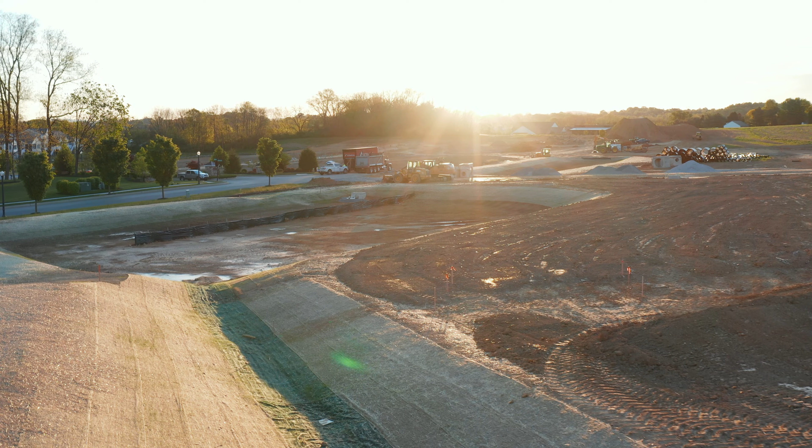I'm sure everyone's aware of the 2022 National MS4 Needs Survey, but I want to briefly discuss some of the findings and highlight areas that pose the greatest challenges. So survey responses indicated that municipal governments nationwide spend an estimated $23 to $40 billion annually on stormwater programs and infrastructure investments, and only 32% of those respondents stated that they didn't need funding beyond the existing budget.

Additionally, it was identified that aging infrastructure, a lack of funding or availability of capital, and workforce and staffing needs are the top challenges for stormwater programs. And limited funding is consistently cited as a challenge for stormwater programs throughout the nation.

Respondents were also asked about their information and technical resource needs related to the MCMs and other aspects of permit compliance. And they ranked the highest need being funding and financing, then asset management, and the third highest was for green infrastructure and innovative SCMs. So the last data point that I want to highlight is when MS4s had to rank their information and resource needs associated with MCMs, post-construction scored the highest.

So now that we've established that most MS4s are struggling with post-construction, I want to talk about some of the more detailed issues and challenges surrounding MCM5. I want to start by briefly defining what post-construction controls are and then go over the MCM5 permit requirements. The major requirements of MCM5 can be broken down into 9 distinct sections. Also, it's important to note that these requirements apply to new development and redevelopment projects that disturb greater than 1 acre, or projects smaller than 1 acre if they're part of a larger common plan of development or sale, and all projects that discharge into the MS4.

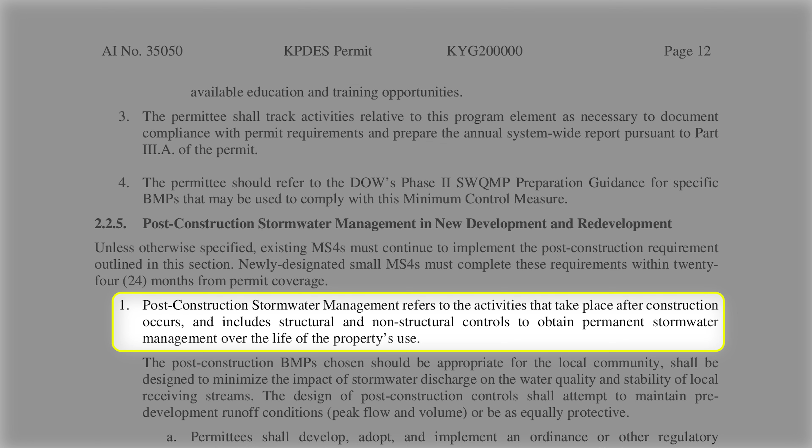The Kentucky MS4 General Permit defines post-construction stormwater management in the following way. Post-construction stormwater management refers to the activities that take place after construction occurs and includes structural and non-structural controls to obtain permanent stormwater management over the life of a property's use.

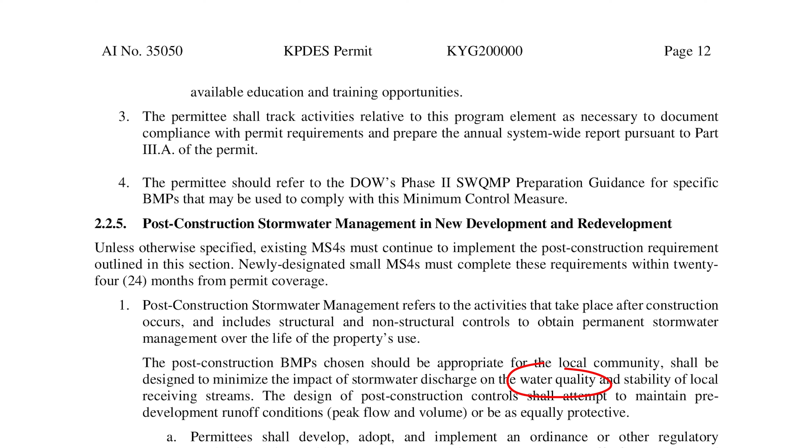The permit goes on to provide a little more context on those activities and controls, and from the language we see here, we can clearly see that the primary objective of implementing post-construction BMPs is to protect water quality. However, historically, quantity control has often taken priority, and we'll discuss that later on as we review some of the data from the annual reports and the curated sources. For now, I just want to continue examining the permit requirements around post-construction management.

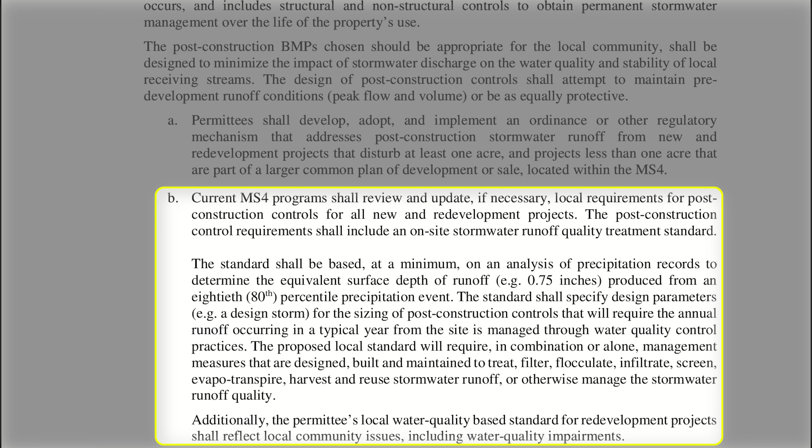So item 1A just requires the establishment of an ordinance or regulatory mechanism to address post-construction stormwater runoff. And the mechanism ensures that any new development or redevelopment incorporates proper stormwater controls from the design stage through long-term operation and maintenance. 1B delves into the local post-construction requirements and the inclusion of a water quality treatment standard. You all are intimately familiar with these details, so I'm not going to go into depth. I'll just move on to the next point.

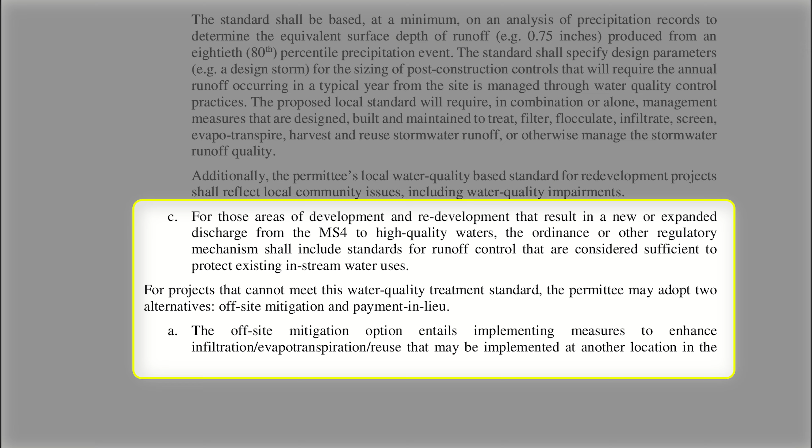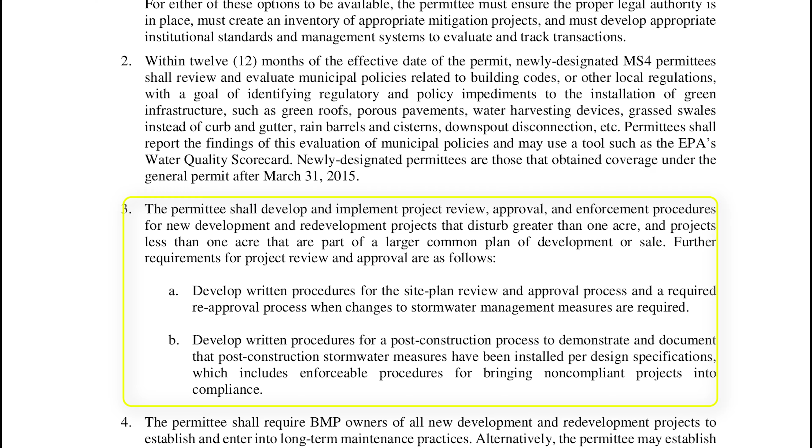1C discusses enhanced runoff control standards for discharge to high-quality waters and alternatives when projects can't meet that water quality treatment standard, so you have off-site mitigation or payment in lieu that's available. 2 is an evaluation of municipal policies to identify any regulatory or policy barriers to installing green infrastructure. 3 details the project review process and enforcement procedures, dealing with site plan review and approval and post-construction verification.

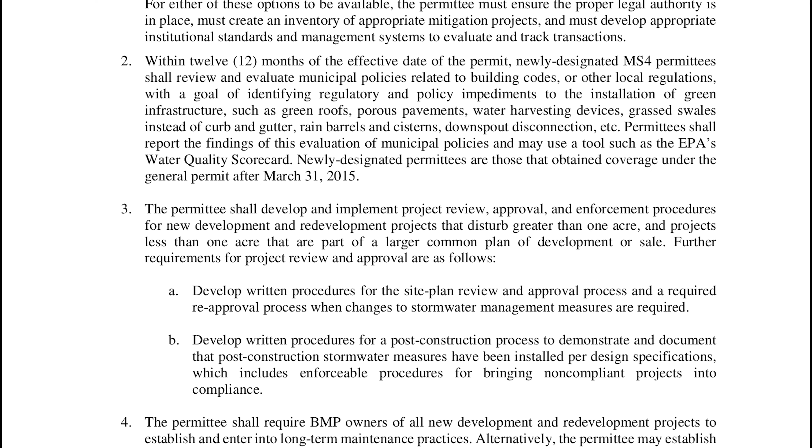So at this point, we can begin to talk about how some of the MS4s are dealing with MCM5 requirements. From our 2022 annual report review, we saw that 39% of MS4s actually use a standardized form for plan review, but 41% didn't specify whether they use forms or not, and 18% explicitly do not use forms. All of this highlights the need for more uniform practices or the adoption of standardized procedures.

So now we're going to shift back to the permit and talk about long-term maintenance requirements. This is one of the most important aspects of a successful post-construction program, and this section requires that permittees ensure that BMP owners establish and enter into long-term maintenance practices. Alternatively, other enforceable mechanisms may be established to make sure that the long-term maintenance of both structural and non-structural BMPs occurs.

So from a review of the 2022 annual report, we looked at the adoption of long-term maintenance agreements among MS4s. And fortunately, a majority of the MS4s, 70%, require long-term maintenance agreements. And these agreements are critical for maintaining the functionality and compliance of stormwater infrastructure over time. However, 22% of MS4s don't require agreements, and a very small portion didn't actually specify.

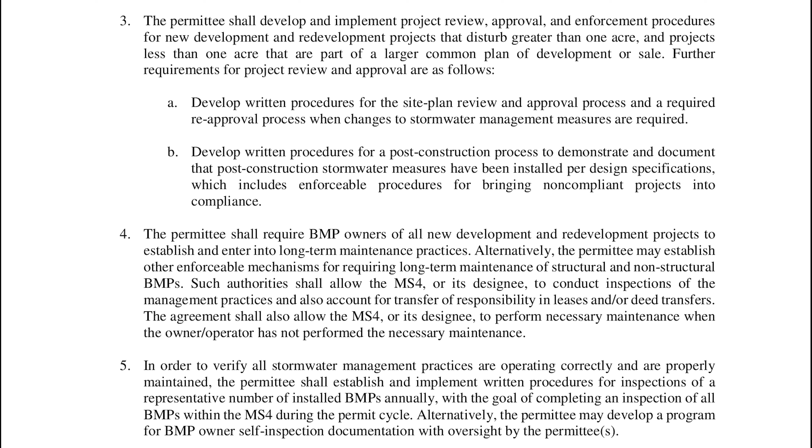So going back to the permit, requirement number 5 deals with BMP inspection procedures, and it requires that the permittee establish and implement written procedures for inspecting a representative number of installed BMPs annually, with the overall goal being that the program should complete an inspection of all BMPs within the permit cycle. Now, alternatively, the permittee can shift that to the BMP owners to perform self-inspections, provided that there's some oversight by the permittee.

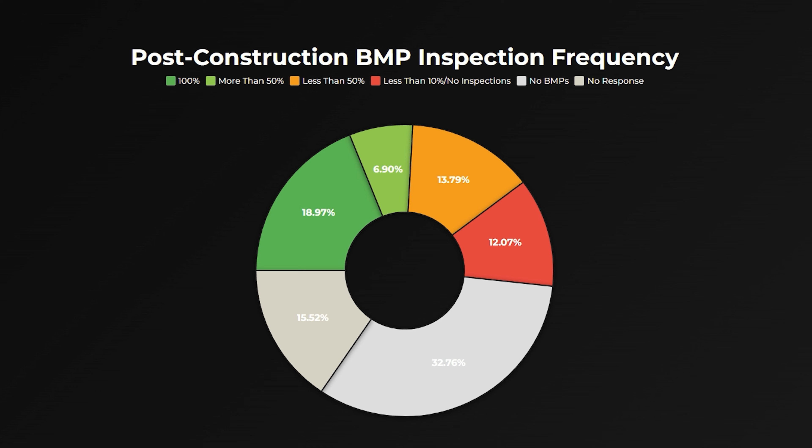When we looked at the inspection frequency for post-construction BMPs, it varied quite a bit. 18% of the communities inspected 100% of their BMPs, 25% inspected at least half, and then 32% reported having no post-construction BMPs, which is concerning, but 15% did not respond, and a lower percentage of communities inspected less than 50% of their BMPs, with 8% not conducting any inspections at all.

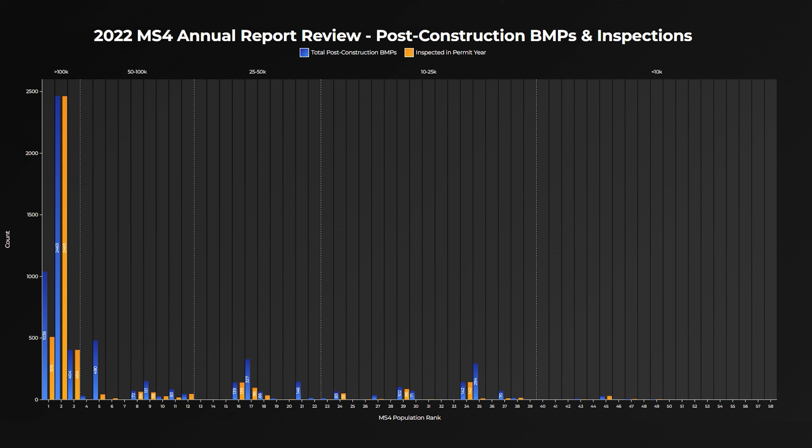So looking at this in a different way, the bar chart that you see displays the total number of post-construction BMPs with the number inspected within the last permit year across various MS4 population ranks. The average number of BMPs across the ranks is 56, with an average inspection count of 33. And combining the insights from both graphs, it's evident that while some MS4s are highly proactive in inspecting and maintaining their post-construction BMPs, a significant proportion either do not have BMPs or are not conducting necessary inspections.

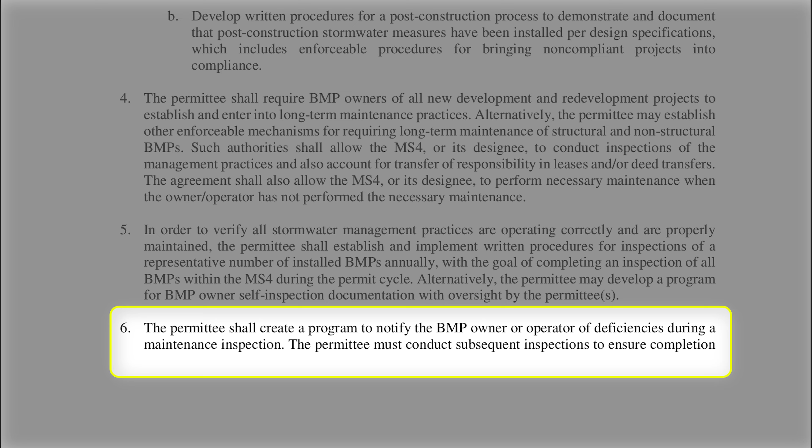So going back to the permit, number 6 is just a notification and follow-up for BMP deficiencies. And it just requires that the permittee develop a program to notify BMP owners or operators when deficiencies are identified and conduct subsequent inspections to ensure that required repairs are completed. As far as the enforcement, if the deficiencies are not corrected in a timely manner, the permittee must enforce its correction orders and, if necessary, perform the required maintenance work.

And I wasn't really satisfied by that because entities that inspect fewer BMPs might have artificially lower counts of maintenance and enforcement actions simply because they haven't identified all the issues that might be present. To address this, we normalized the counts by the number of BMP inspections and performed a basic t-test to see if the differences between the groups were significant.

The maintenance rate t-test shows a statistically significant difference between the two groups, indicating that the entities inspecting more than 50% of their BMPs have a significantly lower maintenance rate compared to those inspecting less than 50%. However, this was not the case with enforcement actions, which had no significant difference. And those results just support the idea that more frequent inspections are associated with lower maintenance needs, but do not significantly affect the number of enforcement actions issued.

So going back to the permit, number 7 just deals with the annual reporting requirements and just states that the permittee must summarize the following information in the annual report. So details on project reviews and BMP installations, details about maintenance inspections like the number of inspections, the number of enforcement actions taken, ordinance changes, and the thing we're going to talk about in more detail is training.

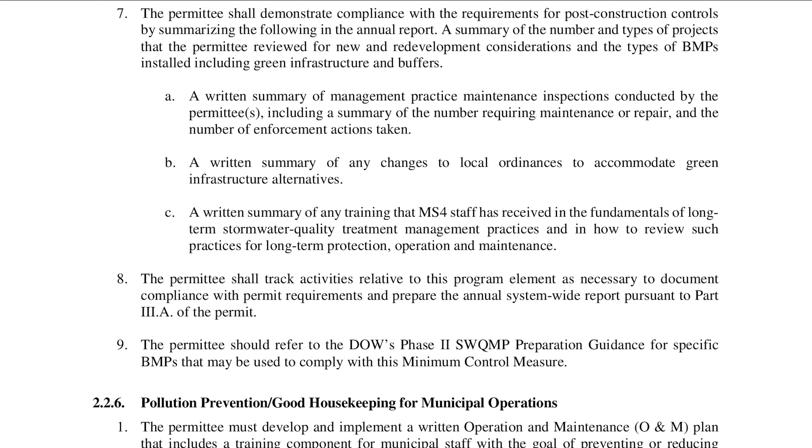So going back to the permit, we'll hit both of these in tandem. So we have number 8 and number 9. 8 is just talking about the activity tracking for compliance, and 9 is just the stormwater quality management plan preparation guidance. So now that we reviewed the permit requirements, I would like to transition to discuss the most common types of BMPs that we see, with a particular focus on green infrastructure since that's the permit prioritization.

Additionally, I also want to cover how a robust long-term maintenance agreement structure can improve post-construction programs, some of the barriers associated with long-term maintenance agreement implementation, and lessons from other programs that may be applicable.

So the graph that you see shows the total number of BMPs and the listed MS4s by type. As you might expect, most MS4s have a preference for dry basins and water quality units. However, you do see some varied use of green infrastructure within the larger MS4s, but this is not ubiquitous, especially when you look at smaller MS4s. In fact, our review revealed a similar trend, with the most common types of BMPs being dry detention and water quality units, which are ubiquitous across the population groups.

Building on our discussion of permit requirements and the emphasis on green infrastructure and water quality versus quantity, we observed different strategies among larger MS4s in managing stormwater. For example, our dialogue with some of the larger MS4s reveals a nuanced classification of BMPs that distinguishes between those designed solely for quantity management versus those designed for quality.

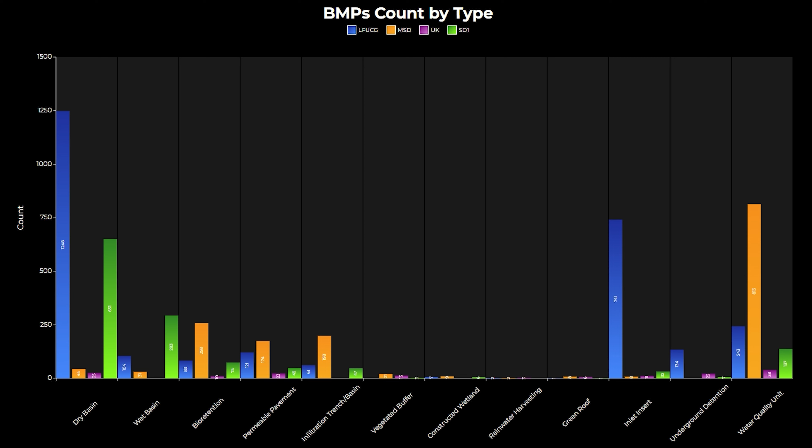For example, while older detention basins were primarily designed for flood control, newer installations now also address pollutant removal and water treatment standards. This distinction is critical as it impacts the frequency and rigor of the inspections being conducted, and also influences long-term maintenance agreements and compliance tracking. It's that transition that underscores the inherent challenges in retrofitting existing infrastructure to meet current permit standards. For instance, MS4s face significant logistical and legal hurdles when attempting to apply new maintenance standards retroactively to BMPs installed before the new permit standards were in place.

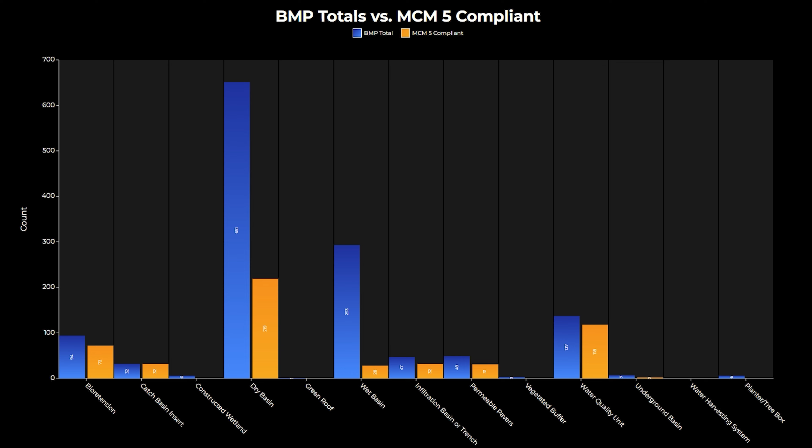So now that we've covered the state and the requirements of post-construction controls in Kentucky, I would like to discuss long-term maintenance agreements, and mainly the key structure of long-term maintenance agreements, including barriers and strategies to offset BMP operation and maintenance cost, and associated considerations and challenges.

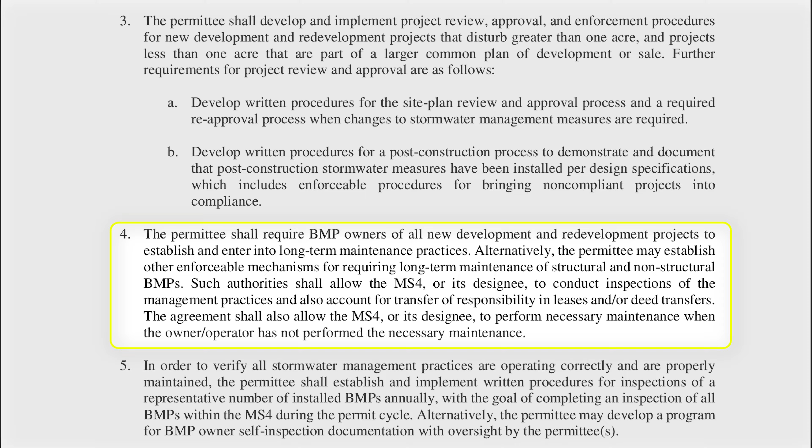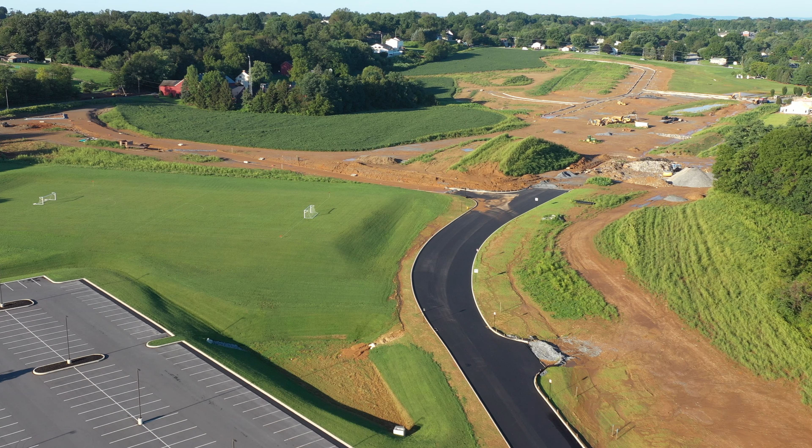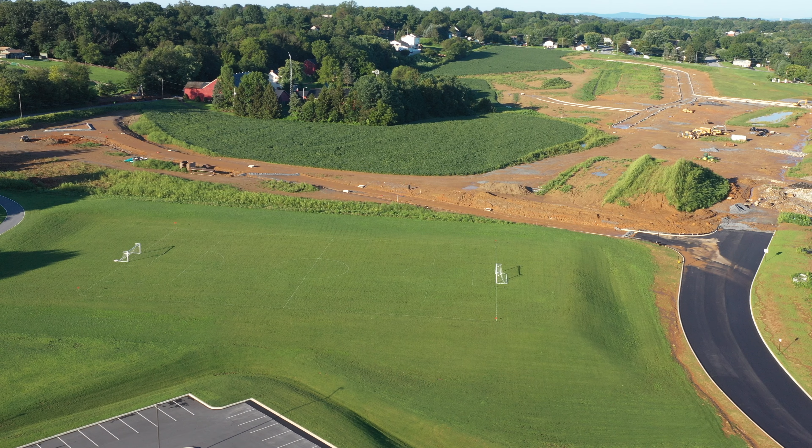So long-term maintenance agreements play a crucial role in ensuring the continued functionality and performance of stormwater BMPs. While the duration of long-term maintenance agreements can vary depending on local regulations and specific project requirements, they are typically established to ensure the functionality of the BMP throughout its intended lifespan. Some agreements may be in effect for a set number of years, 10 to 20. Others may be structured to remain in place in perpetuity, effectively binding the current and future property owners to the terms of the agreement.

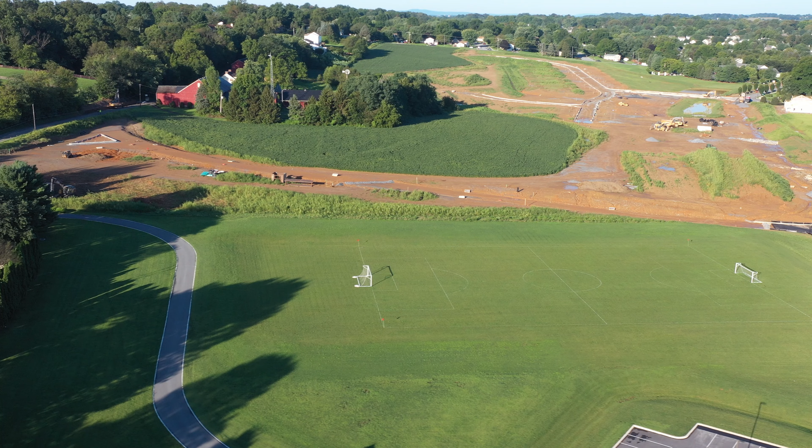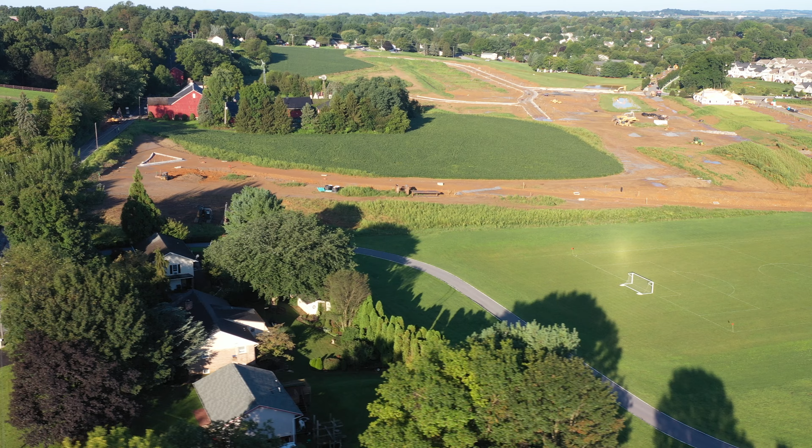For example, a long-term maintenance agreement might require the property owner to perform and document specific maintenance tasks on a regular basis. Things like inspecting and cleaning out the inlets and outlets, removing sediment, and maintaining vegetation, with the goal being to establish a framework for ongoing maintenance that safeguards the investment of the stormwater infrastructure and protects water resources.

Drawing from a 2013 study out of Yale University, we can categorize the structure of maintenance programs into 4 primary models, each with unique characteristics, responsibilities, and considerations. So let's start with Model 1, which is the agency-managed maintenance program. In this model, all the maintenance activities are handled by in-house staff, with the agency responsible for the GI program. This centralization allows for consistent maintenance standards and direct oversight of operations. And your team is especially trained in GI practices. And the biggest advantage here is the high level of accountability and quality control.

However, it does require significant investments in staffing, training, and equipment, which can be challenging for smaller municipalities or rapidly growing green infrastructure networks. Moving on to Model 2, the contractor-based maintenance program. This is the most common approach where private contractors perform maintenance tasks under the supervision of the managing agency. Detailed contracts define the scope of work, performance expectations, and inspection protocols.

This model offers flexibility by allowing the municipalities to hire contractors with specialized expertise. It also lightens the administrative load on municipal staff, letting them concentrate on the overall program management. But a key challenge of this is ensuring quality control. If contractors don't consistently meet standards, rigorous contract enforcement and inspections become essential.

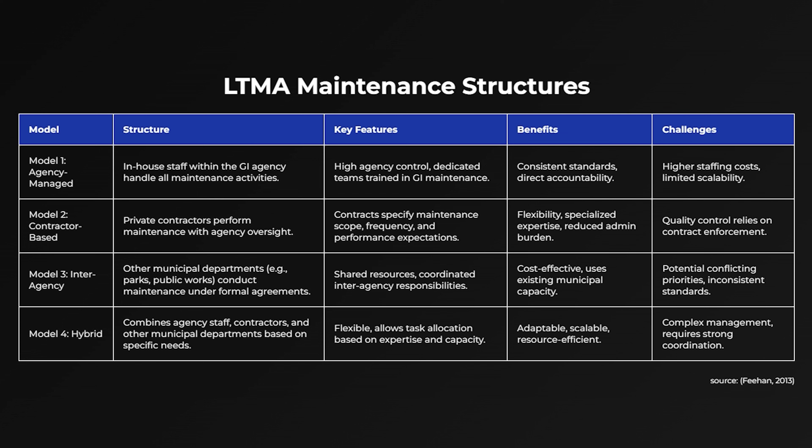This flexible and scalable approach allows municipalities to allocate resources efficiently, especially in cities where you have a large inventory. However, the success of a hybrid model hinges on the effective coordination among all parties to avoid communication gaps and ensure that every maintenance activity meets established performance standards.

Regardless of the model that you use, most programs suffer from the same general barriers related to the operation and maintenance of post-construction BMPs. However, certain strategies to overcoming these barriers may be different based on the model that you use. But generally, these barriers fall into four distinct categories. So we have financial constraints, technical and expertise challenges, operational challenges, and institutional and regulatory gaps.

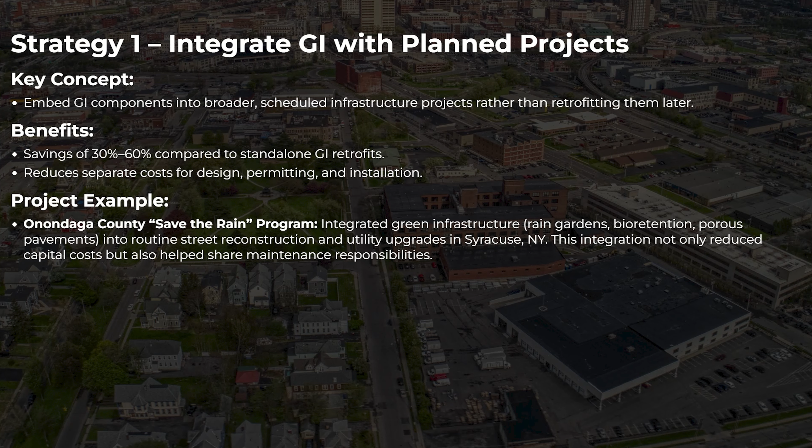Since funding is seemingly a challenge faced by most MS4s, I want to discuss 4 strategies to offset cost. So integrating GI into new or planned infrastructure projects, such as during road resurfacing or utility upgrades, allows for cost sharing and minimizes separate design or permitting fees. For example, Onondaga County's Save the Rain program in Syracuse incorporated GI as part of their annual street work. This approach yielded significant savings by ensuring the incremental costs for GI were only those beyond the already scheduled improvements.

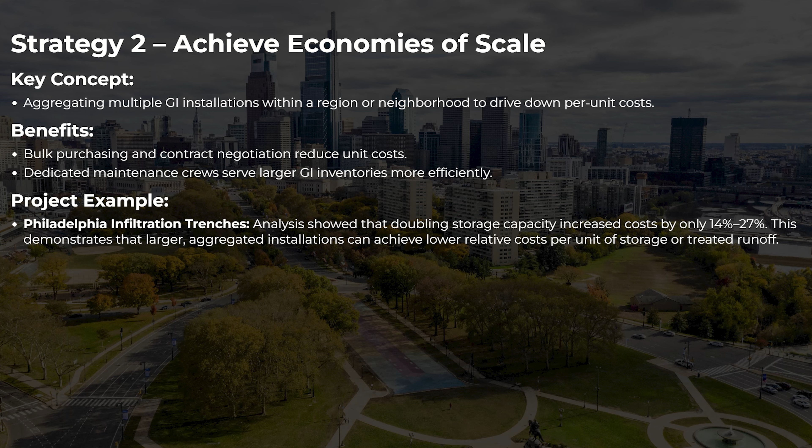For strategy 2, achieve economies of scale: when projects are scaled up, whether it's a series of green streets or multiple rain gardens, the cost per unit of GI tends to decrease. For example, in Philadelphia, research indicated that doubling the storage capacity of an infiltration trench only raised costs by 14 to 27%. This principle shows that scaling can effectively reduce both construction and long-term maintenance cost.

For strategy 3, utilizing innovative financing mechanisms, dedicated financing tools such as stormwater utilities can create a stable revenue stream. For instance, Rockville, Maryland, like many MS4s in Kentucky, has an ERU-based fee structure to ensure that the operation and maintenance costs of stormwater projects are covered continuously. Additionally, incentive programs that offer fee credits for private investments in GI help to further distribute the financial responsibility.

Local expertise is a valuable asset. For example, Arlington County leverages its Parks Department knowledge on vegetation care, and Fairfax County runs an invasive management area volunteer program with local master naturalists. And in Olympia, Washington, even though the stormwater utility funds the maintenance, the work is carried out by the Parks Department. Such partnerships reduce costs by using existing human resources rather than hiring new specialized teams.

The last thing I want to discuss is a novel way of incentivizing the use of green infrastructure and safeguarding investments. Anecdotally, it seems like most municipalities would be more eager to embrace GI if it wasn't for the plants. Specifically, the maintenance surrounding the plants, or some assurances that if the vegetation fails, they're not out on their investment. The Yale study that I brought up earlier goes into detail on warranties related to GI projects, which is not something we see a lot of in Kentucky, so that's why I want to discuss it.